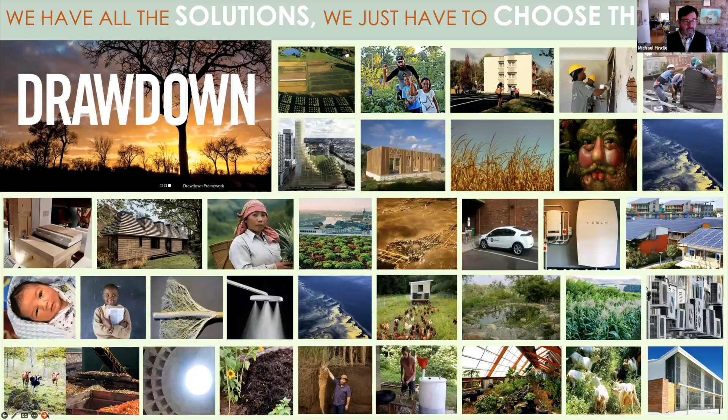I want to start on the bright side, which is to say that we have all the solutions we need to save community and planet. Literally, we need no more technologies. We don't even need to use some that are being proposed. We have everything we need in a holistic, systemic manner to solve for climate change.

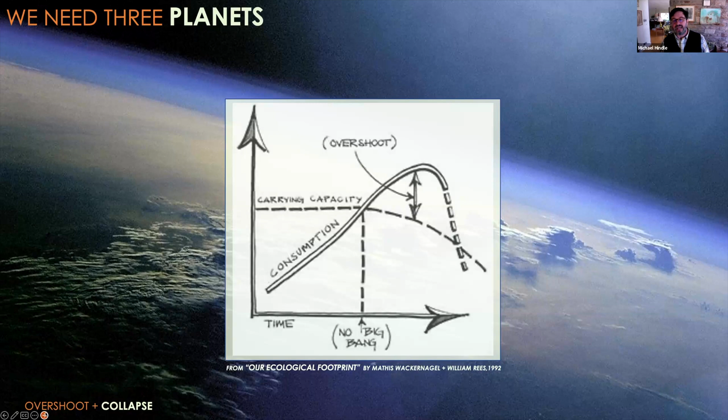Now I'm going to hit that with a little bit of a caveat, which is to say that our society, our socioeconomic system as we know it, does not recognize that there are limits. There are biogeophysical limits on planet Earth, and we have overshot our limits by 30% since 1980. And when you overshoot your carrying capacity—I know this is a controversial topic, and there should be a healthy debate about it—but from what I'm seeing in my research, we have overshot our carrying capacity by about 30% since 1980, and we are potentially on the precipice of a systems collapse.

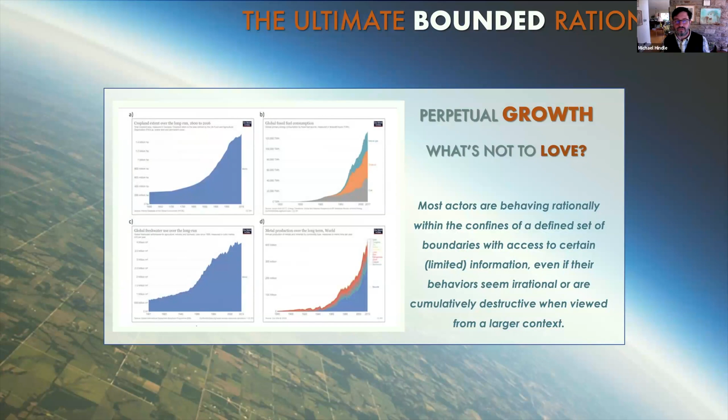We see perpetual growth in every market, in every sector, pretty much, unless it happens to be a market for the common good, like childcare or healthcare. We seem to be able to leverage capital to do unbelievably remarkable things and exponentially scale everything, but perhaps not general human well-being equitably.

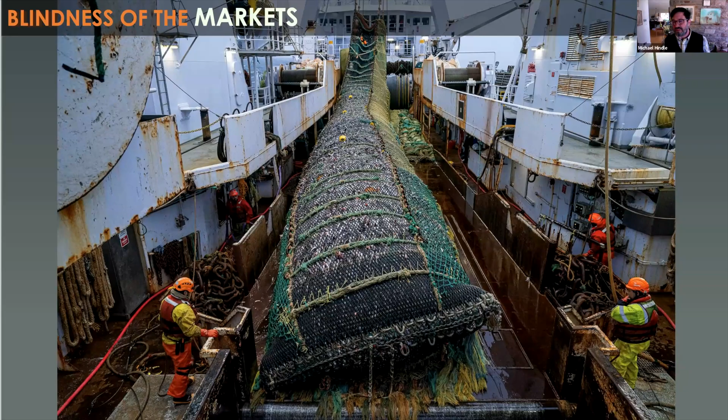I was living on Cape Cod when the transition was being made from modest-scale diesel trawlers to factory trawlers, and the industrial sort of fishery was really taking off. The market knew there was no way you could keep going at this pace, but the increased scarcity and cost of fish leveraged the industry's ability to build out huge factory trawlers and scrape the last few fish from the ocean, which led to the Grand Banks fisheries collapse in 1992.

And I saw the fishermen on the street. I knew them, and everyone in that situation knew this was happening. But markets tend to accelerate towards the precipice.

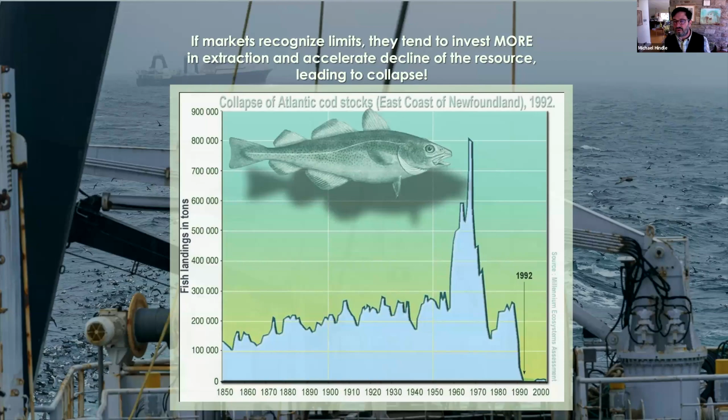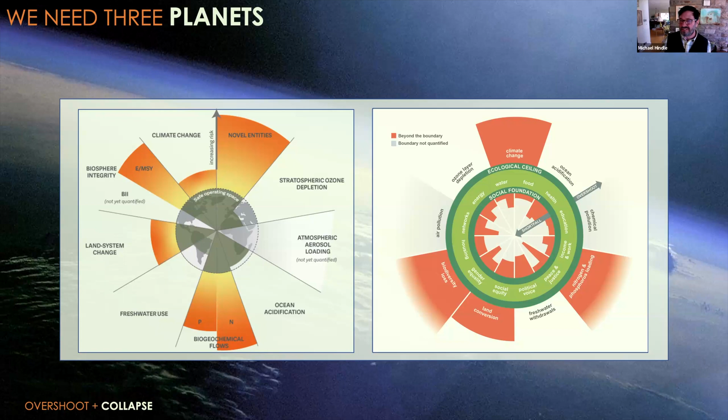We are over our limits in any number of different categories. We are beyond the ecological carrying capacity of the planet, whether it be biosphere integrity, like habitat, chemical loading of the environment, climate change, obviously, or biodiversity loss. All of these things are beyond the carrying capacity of the planet. And certain of them, like chemical contamination, are in all likelihood well beyond the limits, but they're not being regulated to the extent that we'd know we were beyond the limits. They're not being observed. We don't have enough data, but it's certainly true.

So my question, when you asked us to speak at an event called Climate Tech, Aaron, was: what is that? I've always thought that the answer needs to be first, do no harm.

44% of carbon emissions come from the building sector. 70%, or two-thirds, of the buildings that will be in use in 2050 are already in use. So we have to tackle buildings, and we have to tackle existing buildings in order to find our way out of climate change. We cannot build every building zero carbon or zero energy and think we're going to get there. We have to retrofit our cities too.

It's a big job. But if we change our mindset from designing energy systems to match a wasteful building, to deciding what energy we're allowed to use and optimizing the building to that—now that's a strategy that could actually help contain our impacts.

According to the 2000 Watt Society, which has long measured climate impacts, if you boil down your allowable energy on a per household basis for space conditioning, heating and cooling, it would be the equivalent of 16 candles or a hair dryer as your power source. If you screwed in 20 100 watt light bulbs and flicked it on the day you're born, then it turns off the day you die, that's the power you get your entire life, and it has to include food systems, transport, education, everything. But housing is just 16 candles or a hairdryer, that's all you get.

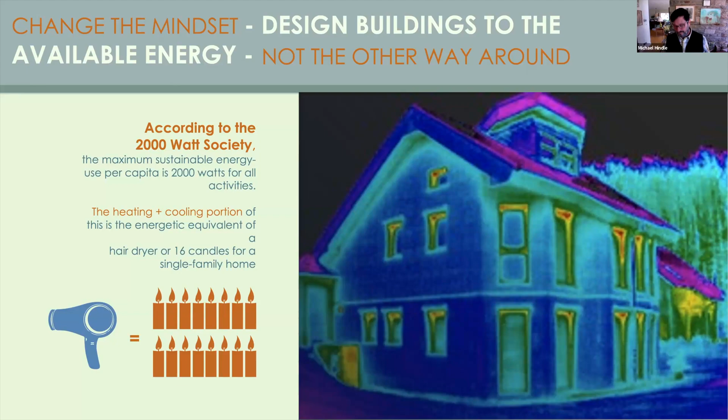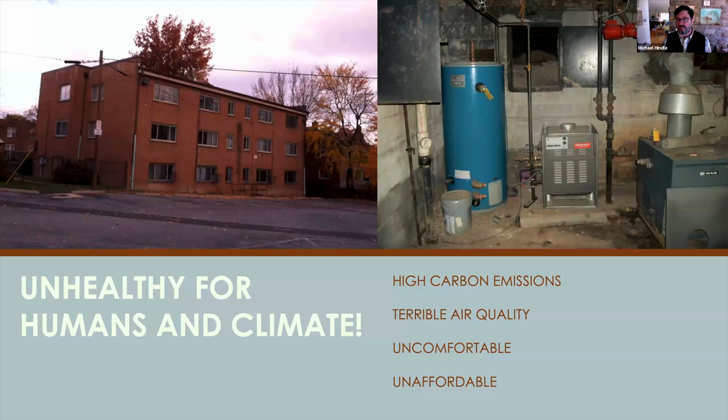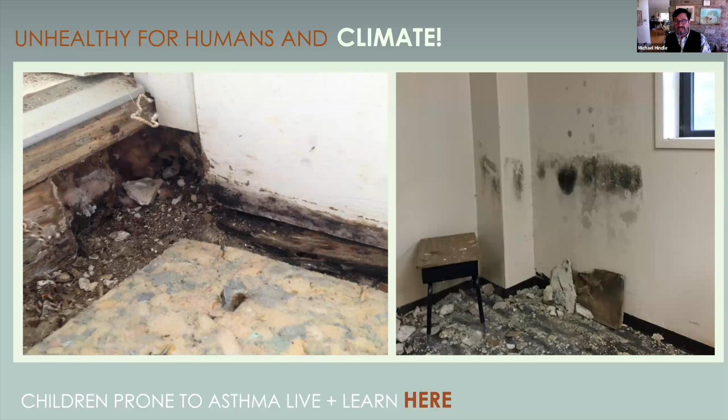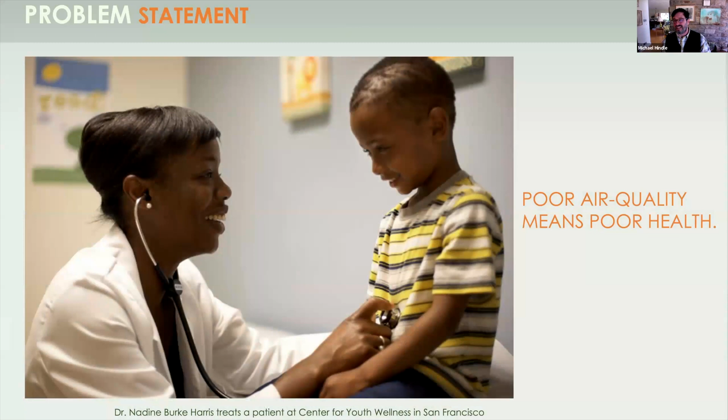So we're walking around working on projects like this. This is our first multifamily project in Washington, D.C. Buildings like this are terrible in terms of carbon emissions, terrible air quality, and terribly uncomfortable. Because of all those things, they become less affordable, since people have to burn a lot of fossil fuel to stay even remotely comfortable. There are all kinds of indoor air quality impacts, and this is part of the main concern, that the way buildings have been built does not foster indoor air quality, partly because things behind the walls that we don't see could be growing mold the whole while. This means children have more asthma and are in the hospital more, and parents have to take them and lose productivity and maybe lose their job.

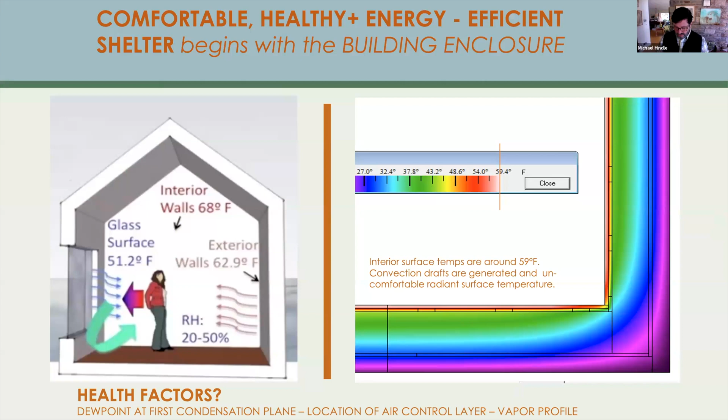If you look at this building we modeled before we added insulation, the back surface of the drywall was at the dew point of interior air, so it was prime for growing mold. And of course it was terribly uncomfortable.

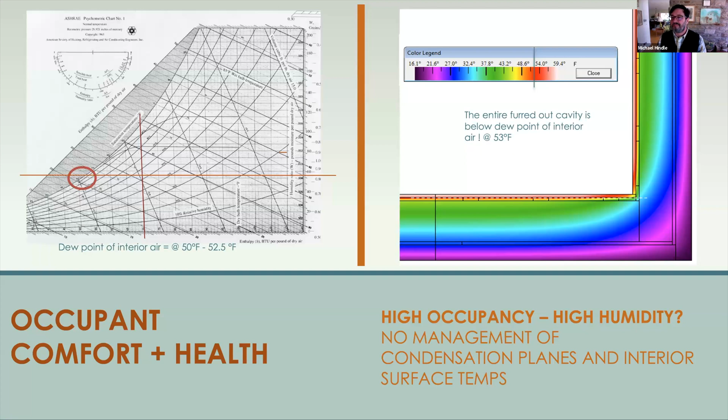So we really need to manage things. When you talk about climate tech, one of the most profound climate techs available might just be a properly identified vapor control layer and thermal control layer. That could be a very, very simple thing.

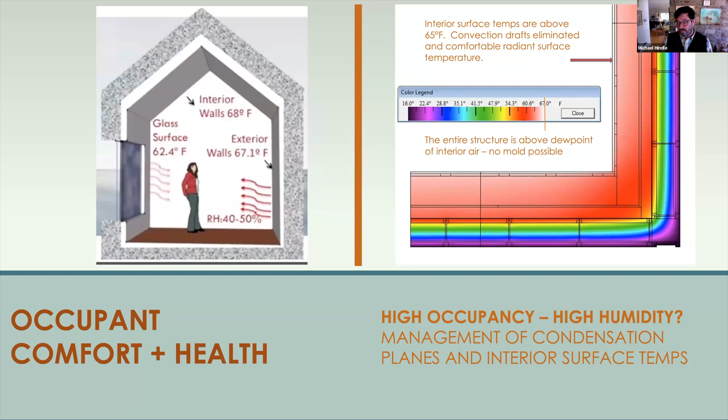Once we retrofitted this building, or 3 buildings but 1 project, the interior surface temperature of the wall and the cavity behind that finish wall was at about 67 degrees if you're heating to 68, which means you cannot possibly grow mold. So we've solved for comfort. The building is radically more comfortable, it uses dramatically less energy, it's near zero energy. So it's more comfortable, using no energy or nearly no energy, and it's healthy.

That's the pitch for the conservation first approach to building envelopes and retrofits. The problem is a lot of our industry said, all right, great, we need R value, and spray foam has a lot of R value, so let's go. They started coating the insides of historic buildings and new buildings with closed cell and open cell spray foam. But the problem is it's a high global warming potential material. Now they're saying, okay, we have zero ozone depletion and zero CO2 equivalent of 1 in their blowing agents and expansion agents, the chemicals they use. But it's still a much higher carbon intensity product than other products I'll talk about in a moment. The product is highly carcinogenic, there are neurotoxins and endocrine disruptors in these materials, but they have a high R value.

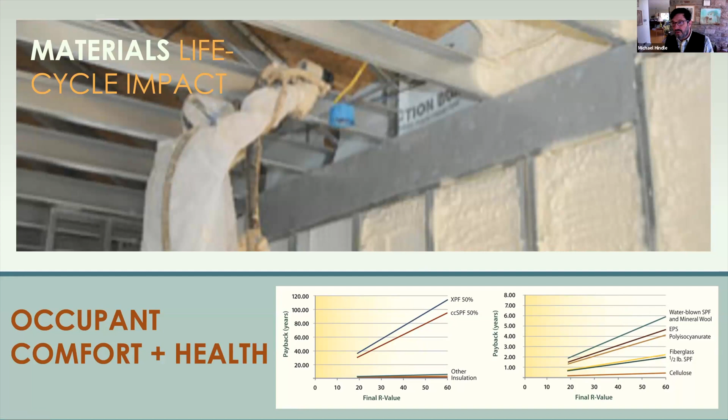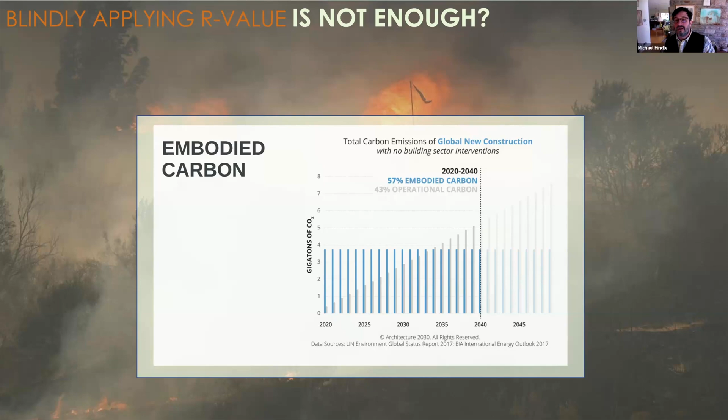So embodied energy is really important. Also, a lot of these foam high R-value insulation products people use for efficiency have incredibly high flame retardants, which are neurotoxins, endocrine disruptors, carcinogens. The foams themselves are also all those things. So we end up designing for efficiency while causing a health crisis and ecological collapse.

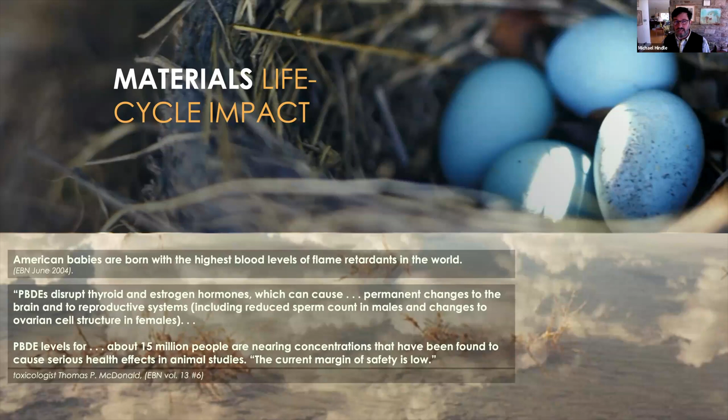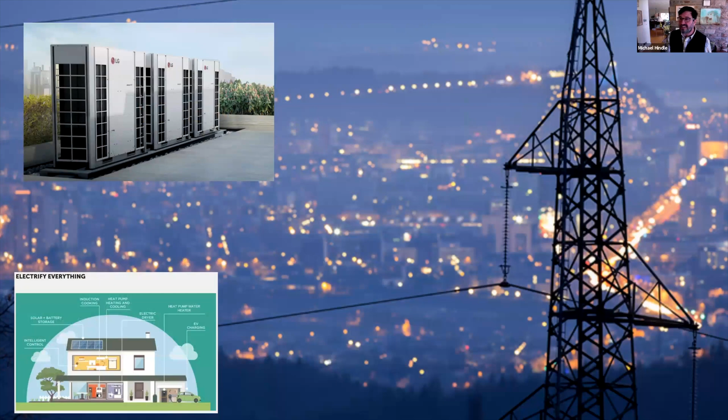Then there's another climate tech idea: let's electrify everything. We're going to go all to heat pumps and put all our household equipment on the grid. That, I want to be clear, is necessary. However, there's a new problem, and we have to think systemically and deeply about these things.

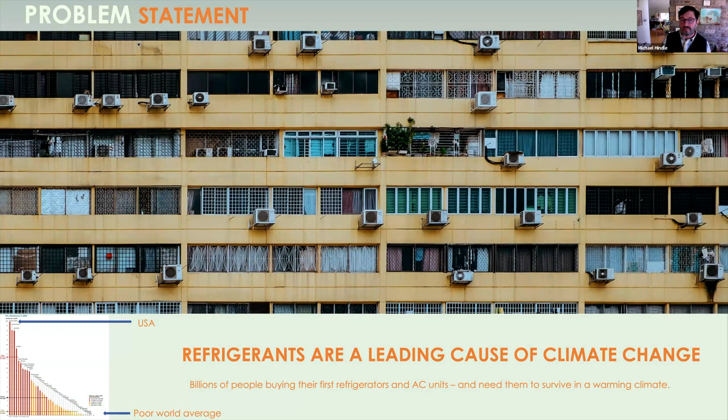Refrigerants are a leading cause of climate change. The refrigerants in those heat pumps are, in some cases, several thousand times worse than burning fossil fuels in terms of climate impact. There are different time horizons for how long the molecules last in the atmosphere, and frankly I'm not fully informed about all of that, but I can tell you a release of refrigerants from these heat pumps has a serious climate change impact.

This chart shows the US has by far the greatest per capita carbon impact, while low income poor world averages are very low on that scale. But now we have billions of people who, in order to stay alive, will have to buy air conditioners because of climate change. They might have survived before without them, and now it's a matter of life and death. So as all these people come online with heat pumps, we're going to have a huge refrigerant problem.

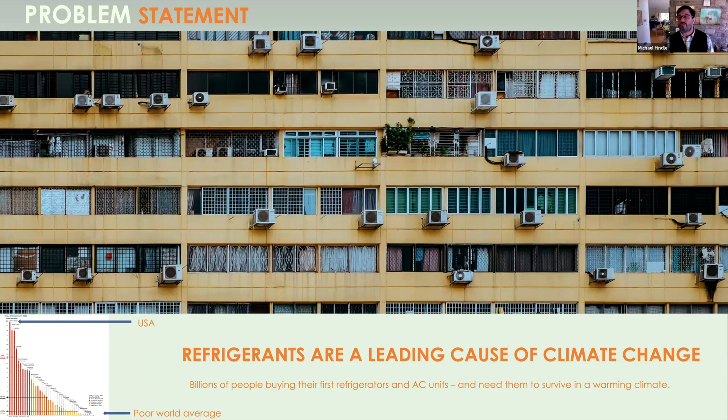This is a building we worked on in Boston, and we were thrilled to work on it as a mass timber project. It's Passive House, it's wonderful. But it was a VRF system, a variable refrigerant flow, with refrigerant pipes going everywhere.

A lot of people say we're solving that problem because the refrigerants now are no longer 14,800 times as bad as carbon. Now we're down to somewhere around 2,000 times as bad as carbon as a climate impact. And we're even switching over to refrigerants that are 675 times worse than carbon. But it's still 675 times as bad as burning fossil fuel. So if you have a large leak, you've undone all the good work of electrifying by releasing that refrigerant.

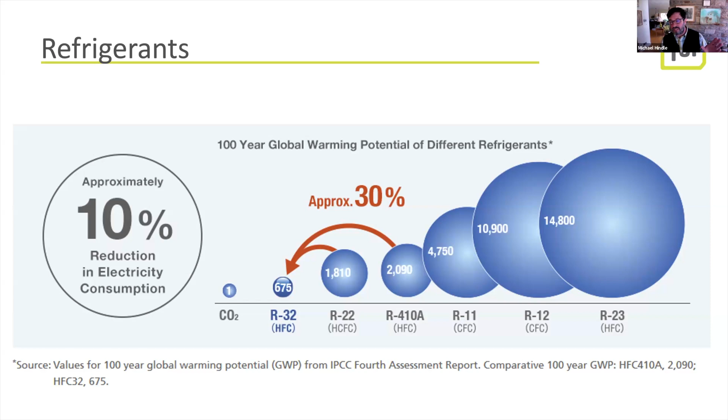That's not to say we shouldn't do heat pumps. It's just to say we have to be mindful that there are impacts with every decision we make. I want to give credit to Ben Rausch of FSI Engineers who created this slide for a presentation we did together.

Here's the distribution system with that VRF system in the project in Boston. That's a lot of refrigerant, and that's a lot of climate change. I've had projects where lightning would strike and you lose it all. We've also had projects with just not very good workmanship, and you lose all or a significant portion of the refrigerant. So no one really knows how much damage has been done, but it's happening.

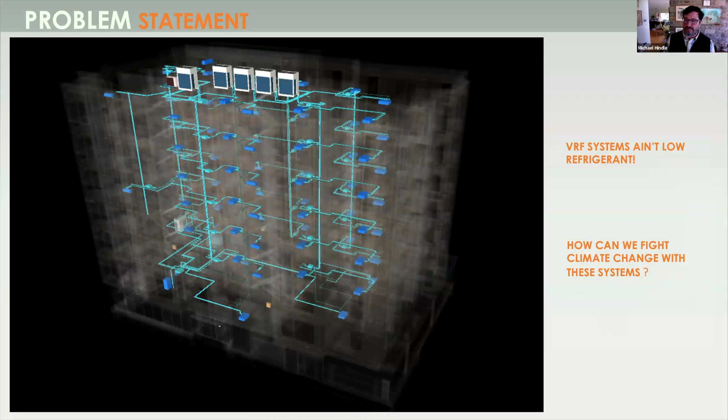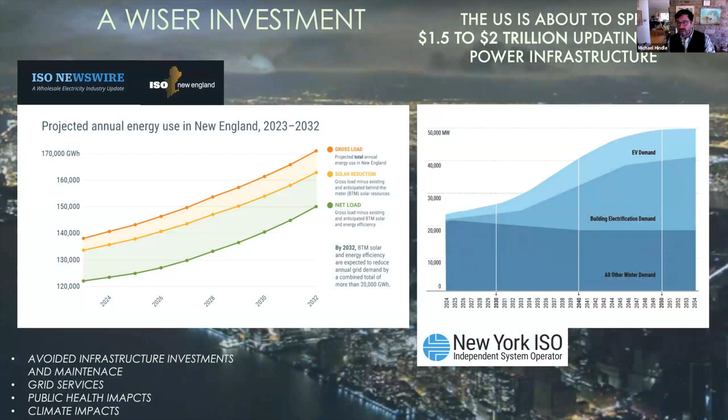So if we electrify with these systems, we could be running into real problems. Also, as we electrify, total electricity demand goes up, which puts the grid more under stress, and we're going to have to spend about $1.5 to $2 trillion updating the power infrastructure. So electrifying is good, but not if you do it with our current systems and our current approach.

So now there are people literally debating how wonderful it would be to turn massive amounts of forest into PV solar farms in order to offset our increased energy demand. Again, why aren't we reducing our energy demand? That's the question—not how much forest do we plow under for solar.

But if we put all that solar up, the people who run the grid like to have a nice base load of energy. They don't like large fluctuations, because then they have to manage these surges of energy demand and the collapse of energy demand. If we keep putting solar up at the rate we're going, in the middle of the day, when the sun is most productive, we're hollowing out the grid demand—this dotted line. Come the afternoon, you have this massive load ramp, which means in the morning they have to start turning power plants off, and then they have to turn them all back on. This is really intensive, both in terms of impacts on the grid and their operations. It's very, very hard to manage.

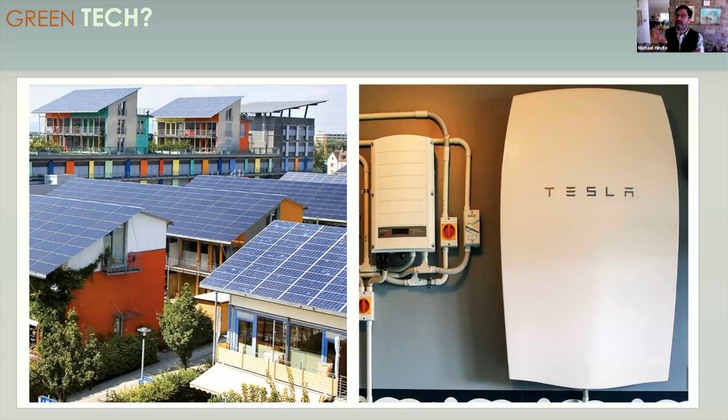So if we put in a battery—let me be clear, I would never buy a Tesla right now—but if we buy a battery, we can take that surplus energy, put it into the battery, and then release it in the evening, precisely when that load ramp is happening. Then we become good grid citizens, helping the grid perform as it should, as a common resource for all, with less cost. So now we balance how much solar we put up so that we can still afford some battery and actually balance out those impacts.

However, even that solution is basically driving a new colonialism in Africa and elsewhere for precious metals to put into these pieces of technology. So is this climate tech—this wicked sexy battery by our friend Elon—is that climate tech? The answer is, at best, a highly conditional assessment of whether that's climate tech or not, because what we're actually experiencing is massive forms of new wage slavery across Africa, particularly in the Democratic Republic of the Congo. In Africa and Asia, anywhere they can find these rare earth metals, people are being exploited terribly for our convenience and for the very good goal of climate change mitigation. But it all has an impact.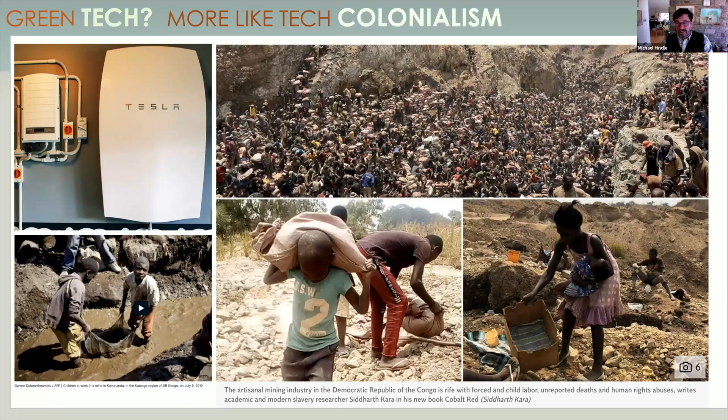So, wow—is this climate tech? No, it's colonialism, or maybe it's both. So I go back to my question: what does it mean to first do no harm?

The problem may be in the way we're thinking about technology. We think of a rocket as being super high technology—it takes a lot of engineers to make a rocket fly to the moon or Mars. But it's destructive as heck to build a rocket with all the materials it uses. It is literally destroyed in its use, and it destroys the climate while it blasts itself up there. So on three categories, a rocket is absolutely terrible technology, even though we'd call it high tech.

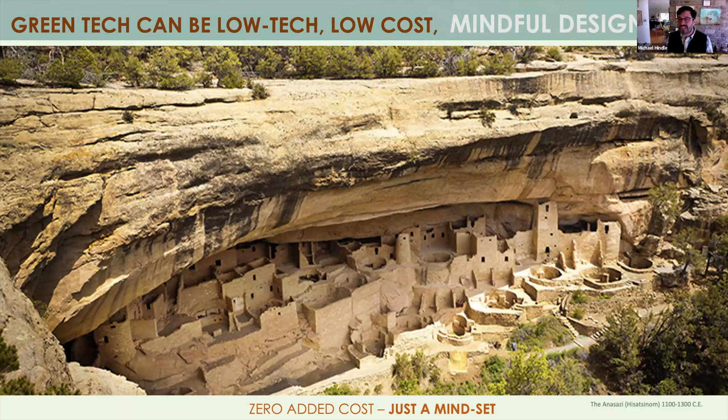Whereas there are solutions where you can create generative technologies. How might we do that? First of all, back on the theme of do no harm—people have known for thousands of years how to limit their heating loads and reduce their cooling loads simply through mindful design. This doesn't cost anything, it helps the climate, it's a generative approach, and it's just a mindset. It does not add more money.

So our building in Washington, D.C., Barry Farm, is a redevelopment of the first freed Black community, I believe, during Reconstruction, right in Southeast DC. And so it's being redeveloped.

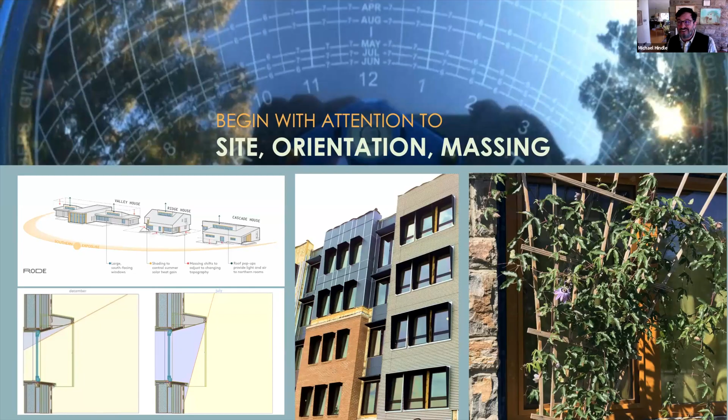So begin with your site orientation and massing, which you already heard, I believe, from Andy Allwine from our team. And if we have a high performance envelope, we can reduce heat loss and improve indoor air quality and save a ton of energy.

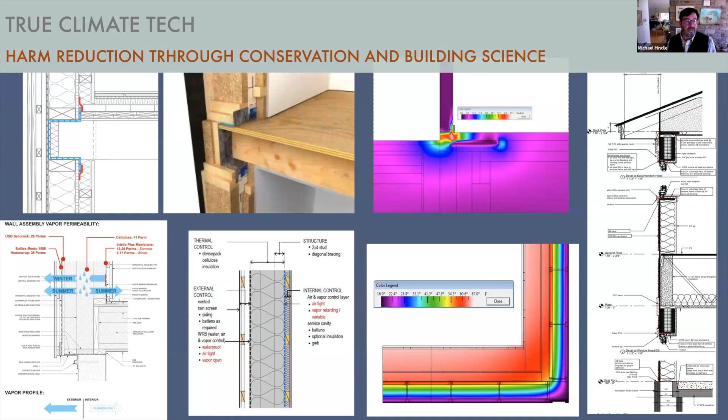So that's harm reduction. And remember I talked about all the bad things about solar, lots of solar and lots of battery. Well, if you improve your building first, you're reducing the amount of those new technologies, things we typically call high tech. With low tech, we're reducing our investment in high tech, which also makes the system much more resilient and robust.

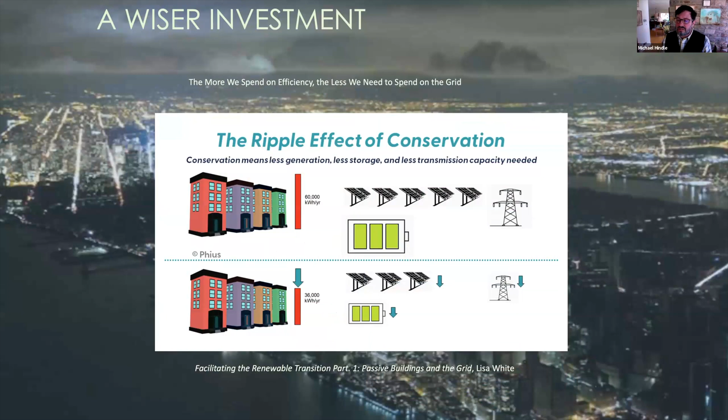So all of these things up to this point are ways to sort of unwind this degenerative spiral of conventional construction and development. And we're getting a little bit less bad with LEED and Green Globes and all these tools. And if we were to be actually sustainable, we'd be at zero for everything.

And that is a huge job, and most projects are nowhere near that. It's because the systems we're a part of use materials that have been invested in through subsidies for R&D, for research, for extraction, for oil companies. We have all these products made out of oil that continue the use of oil. And those systems are not likely to want to give up their hold on the market.

Before, I was showing charts of how we have exponential growth in economic and material activity, and you hit your carrying capacity. But our whole economic model is built on perpetual growth. And if any politician says we're going to get anything less than 3%, they're immediately rejected. It can't happen on a finite planet.

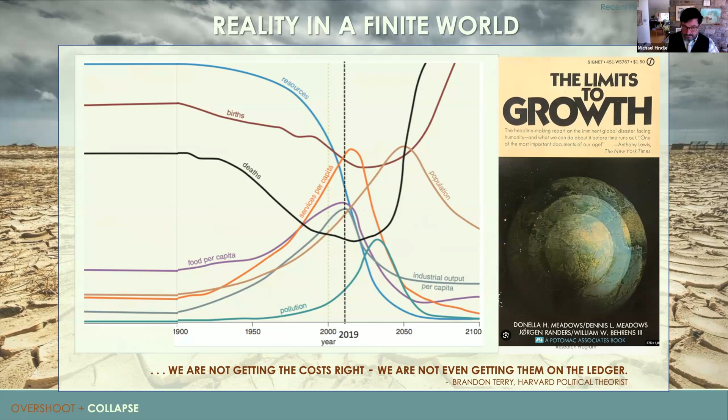And I want to point this out loudly and clearly: everyone's focus right now is justifiably on increasing efficiency to avoid climate change.

However, in the modeling done of these systems, of the global economic system, if you give yourself a 200% land yield increase and assume there's no land encroachment, even though you're rapidly building up your population, and you give yourself an annual 4% reduction in emissions and 100% recycling, which we're nowhere near, and accelerated technological improvements, all dedicated to avoiding climate change—if you do all of those things, all you do from this case one is take our tipping point from about 2020 and push it off to about 2040.

And the economy grows more, things expand more, and the throughput of the economy, the material and economic throughput, is higher, and the waste is higher, and you have a larger population and a bigger crash just a little bit later. So you buy yourself 20 years with all of those things, which we're nowhere near.

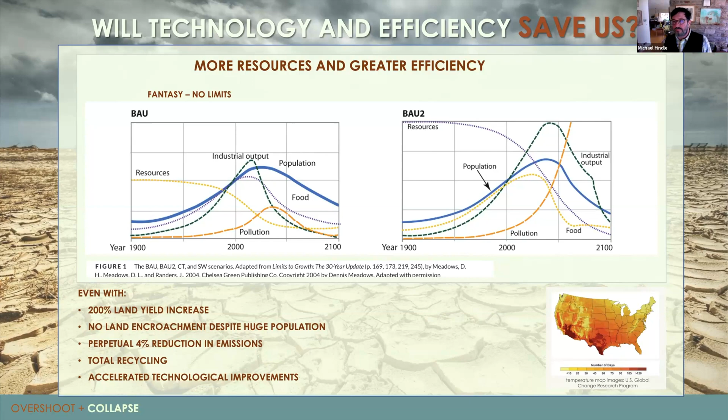Okay, and we also know that with increase in technology, we've actually seen a net increase in production, throughput, and consumption. So if we say, oh, we're 30% more efficient, that tends to actually stimulate more growth because of the way our economic system works, which undoes the 30% savings and actually causes more harm than good.

There's an interesting anecdote that we used to burn a lot of wood in Europe. And then when they found coal, massive coal deposits, and figured out how to extract it, everyone said, oh, we switched from the wood economy to the coal economy. Actually, what happened was they started digging coal and needed timbers to build the tunnels into the earth to extract the coal. We ended up using just as much wood, plus all of the energy from the coal.

So in other words, efficiency does not mean we're better off. It could mean that we just leverage more destruction.

So again, what is climate tech? If we're going to solve that, if we're going to even answer that question, we have to think systemically and change the paradigm. The number one thing we have to do is change the paradigm from becoming more efficient, which was unwinding this downward spiral of degenerative systems, and start creating generative systems.

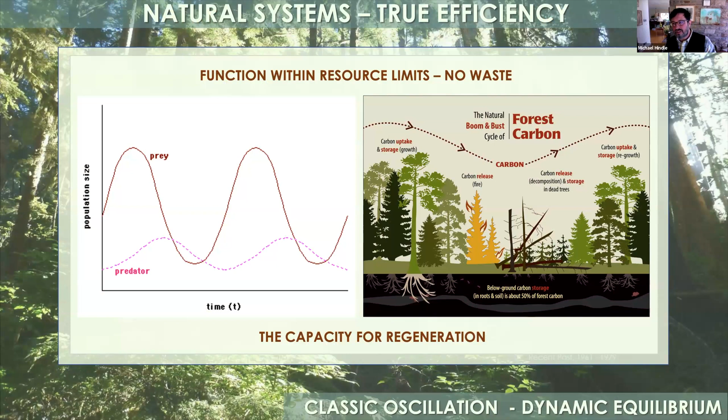These are generative systems. Now, I'm not a physicist, never even got close to physics honestly, but this is the first law of thermodynamics, which is to say energy can't be created, it's only changed. Energy matter is changed, but then the second law is every time you change it into something else, there is a loss along that process.

So that is to say that the more high tech you use, the least efficient you are in global production terms, in natural terms.

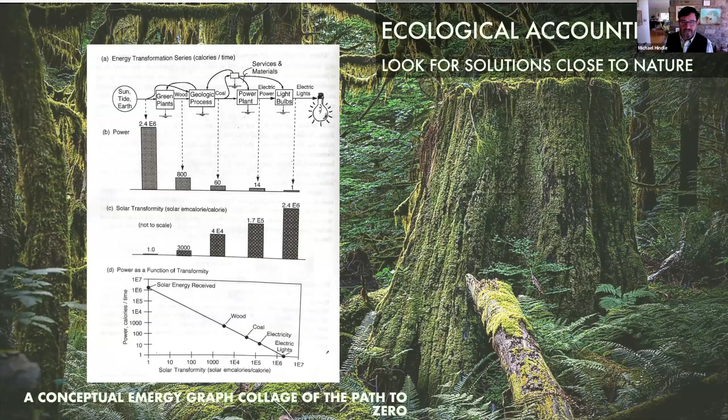So we have to be regenerative. We have to turn this cycle around. We have to get back closer to primary producers. So if we use mass timber, for example, and the forests are sustainably harvested and managed the way indigenous populations did, we could have a net increase of growth, get all the wood we need for building, and have a carbon negative footprint.

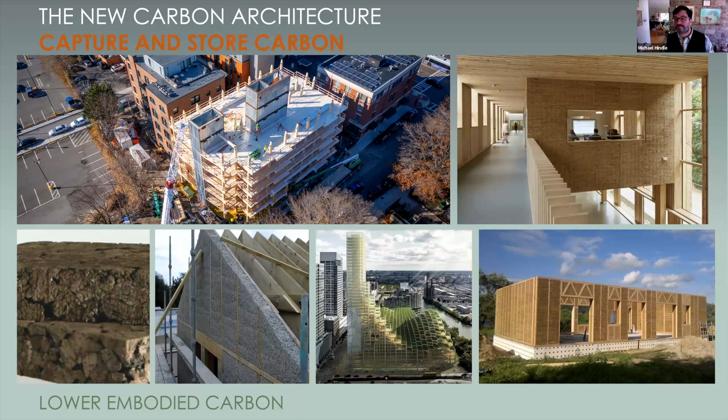So it's a good example of a carbon negative material. You can build the same building and have a huge carbon impact, or you can replace materials with ones closer to primary producers, like nature-based solutions, and actually end up making that building a net carbon sink.

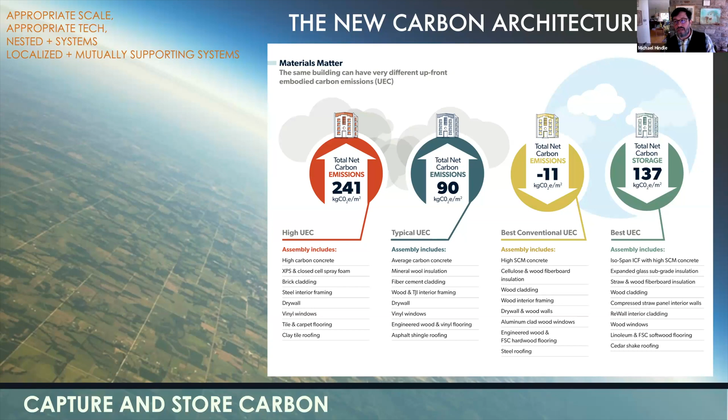So we need to find the appropriate technologies to build the same, to meet our needs, so you can get the same comfort and pleasure, or better, for a negative climate impact. In other words, a positive effect. Okay, but in order to do that, you have to have systemic solutions for systemic problems.

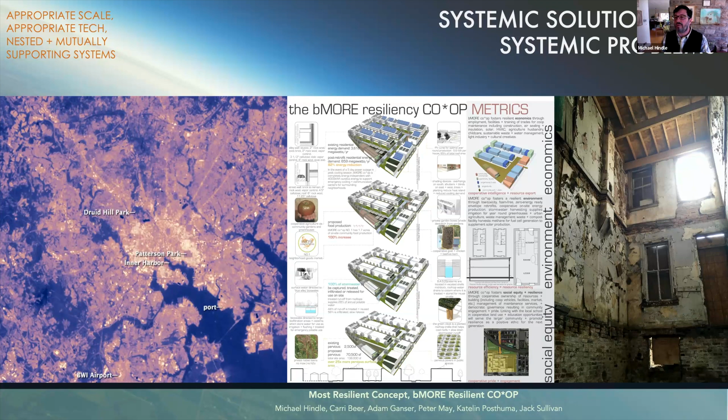You have to think at the scale, and this is where in the upper left you see appropriate tech, appropriate scale, nested and mutually supporting systems. These are all systems thinking concepts. Appropriate scale means you need to understand what the impacts are of anything you use, and if you can bring it from within your bioregion, from within a local economy, you're more likely to be able to understand what those impacts are and mitigate them or reverse them.

So now I'm back to the good news, which is that if you do these things, we get energy efficiency, thermal comfort, indoor air quality, health and wellness generally, building durability, and massive cost savings. And they're all flowing from the same strategies, this interlocking set of strategies that we're discussing right now.

So we need a healing system where everything we do has a regenerative impact. It needs to repair the damage done to the commons, and we have to remember that the atmosphere and the soil and the water, they are our commons.

No one should be allowed to own them, but people are allowed to, in our capitalist, our neoliberal economic capitalist society, we're able to just go and claim something and extract it and send all the bad effects downstream. So we're saying, no, we've got to embrace the whole system and repair, stop doing harm, reuse and restore and repair the commons.

And then we have to focus on how, with appropriate scale, appropriate technology, and mutually supportive systems, we can actually build a regenerative system. And so you need to think of all the interconnections between all the disciplines and all the businesses or nonprofits or organizations that might exist in a neighborhood, for example.

And this was a project Carri and I and some other friends put together for a Baltimore City resilient neighborhood concept. All of them are practical. All of them can be done, but we rarely think in terms of a holistic system.

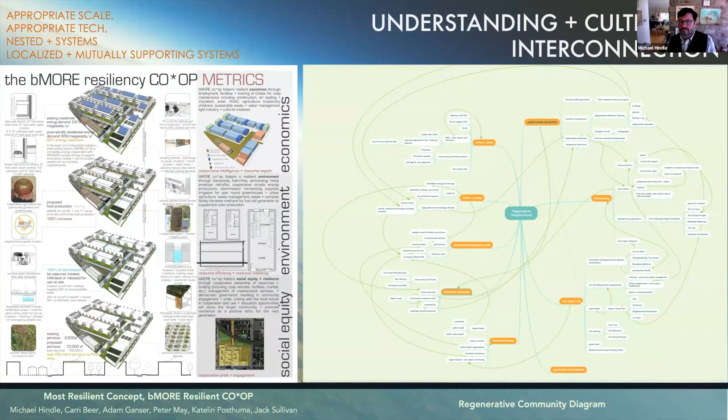So in order to do that, you're going to need regenerative economics, and we're winding down here, which is to say we need to start putting values on things that have real value. And at the moment, we're not actually accounting for the damage function of carbon. So we're not valuing the reduction of carbon. So there's no way you're going to get the market to decide that it's worth doing.

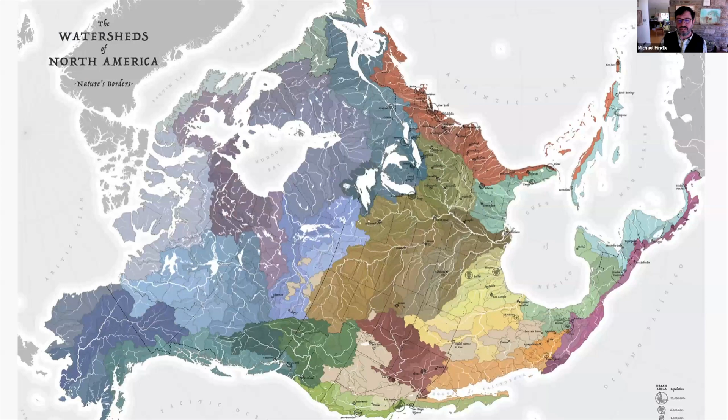But if you look at your geological region, which in this case is geological formations, and you were to overlay it with something like watersheds, and then you could probably add another layer of habitat distribution, you start to understand where your bioregion is and what you can pull out of it, and then how you nurture it so that you recreate a generative regional system.

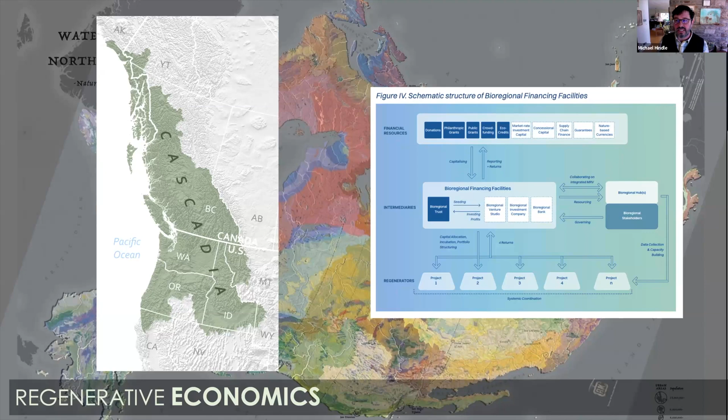And this is a new field of economics, and there are new financing mechanisms that are being developed. And if any of us want to have a future for our society, for our kids, for whomever, just because we care, we all need to be starting to decide to use these mechanisms and not rely on the neoclassical capitalist economic market. It has not found the solutions. It has tended to increase harm, and it will not find the solutions.

So we have to prioritize low impact, low tech. Climate tech is generally low tech. And natural solutions, weight them heavily towards the primary producers, like our friend Farmer Nell from West Baltimore in the upper left there, and the shading on our windows, relying on plants photosynthesizing to create shade. Don't use a piece of metal, but use a piece of metal if you have to, to stop yourself from having cooling loads. So you're making all of these judgments.

If you do regenerative agriculture, you deepen the root structure in the soil and pull carbon down out of the atmosphere, and you can grow food and building materials and build your buildings out of that while composting the waste, even use some of that waste for biofuels.

And then maybe we get into larger things like mass timber buildings, which are more extractive and harder to do sustainably, but can be done. Only once we've done all of those things should we even think about using things like concrete or recycled steel or solar panels or heat pumps or batteries.

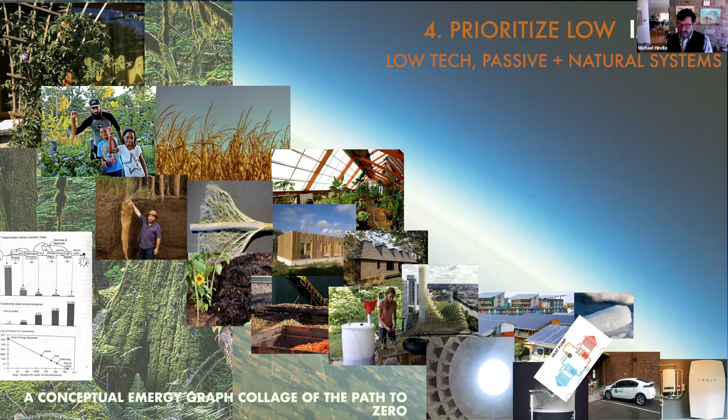So we've got to change our paradigm, shifting back towards the upper left-hand side of this graphic, and the left side of the emergy diagram on the bottom left. And then we have a chance of doing something like this.

The only way the MIT scientists who built that world model in the Limits to Growth in 1972 were able to create a soft landing for society, rather than a total collapse, was by stabilizing the population at 7.5 billion, which means 2 children per couple on average. We had to have a technological increase as before, but we needed to use that technology to abate pollution, increase land yields, and protect renewable resources.

And we needed to reduce our industrial output to enough to make people live with dignity and happiness, which happened to be 10% higher than 2000 levels. In the year 2000, we were all living pretty darn well, and you can get 10% more.

And if you distribute it more equally, everyone could live with dignity and safety. In other words, what is enough? We have to understand what is enough, and we have to say that it's okay to only take enough, because if we don't, we're doomed to collapse. So it turns out that what is technology, making it the lowest impact, and how do we use it, are the most important questions. And can we decide that there is such a thing as enough, which is to say not doing something just because it can be done.

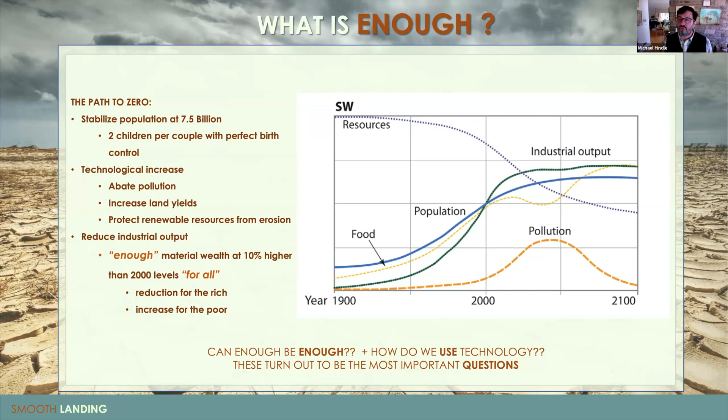We do not need to go to Mars. That will only exacerbate the problem. We need to reduce our technological striving in the conventional sense of high technology.

Now, this does not happen through a market system without human hearts and minds deciding it should be so. Back in 1967, Martin Luther King Jr. gave the speech at the Riverside Church, breaking with LBJ and saying the Vietnam War is just wrong, because he was able to clearly say, I'm looking at the situation, I have a right view of the situation. We are sending our people to go kill other people in a way that cannot possibly be justified. And so he spoke up and spoke out against the Vietnam War. But what he said was, the world demands a maturity of America that we may not be able to achieve. We have to be ready to turn sharply away from our present ways.

So are we as a culture capable of not doing things? Do we not genomically engineer ourselves? Do we not continue to geoengineer the planet in a destructive way? Do we not choose to use AI, because it's ramping up energy use to such a degree that now they have to bring whole new nuclear power stations online to support it? What can we choose not to do?

It takes courage to decide to reduce yourself, in a sense, right? So in other words, from my perspective, the real climate tech we need to be talking about is moral leadership. More deep, systemic understandings of the world we're in and how it works, and applying our very best moral leadership, which does tend to surface from time to time.

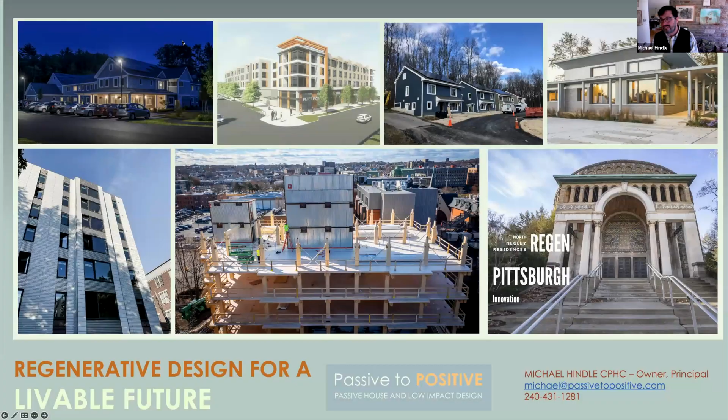Thank you so much. Folks, you got a graduate level presentation, a dissertation here, asked and answered in regards to what climate tech is and what it isn't. And you even learned about the laws of thermodynamics. How about that?

Thank you so much, Michael. I really appreciated meeting you in my hometown of Syracuse, New York, a few years back.

Yep, we both happened to be attending the USGBC Green Buildings Conference in Syracuse, which was at the Syracuse Marriott, which unfortunately had the worst air quality. I take my air quality monitors with me everywhere, and it was just off the charts—not good in that building, unfortunately.

One of the things I learned there, or around that time, was the cheapest kilowatt hour is the kilowatt hour not used. The thesis of last year's Baltimore Climate Tech Plus conference focused on the Maryland Climate Solutions Now Act, building energy performance standards—the most aggressive climate law in the country. At that time, and I think still today, most building owners and corporate tenants don't even know it exists. So we had about 47 subject matter experts last year talk about green leasing and all different aspects of decarbonization in the office sector. This year we wanted to focus on healthy, smart, high performance homes.